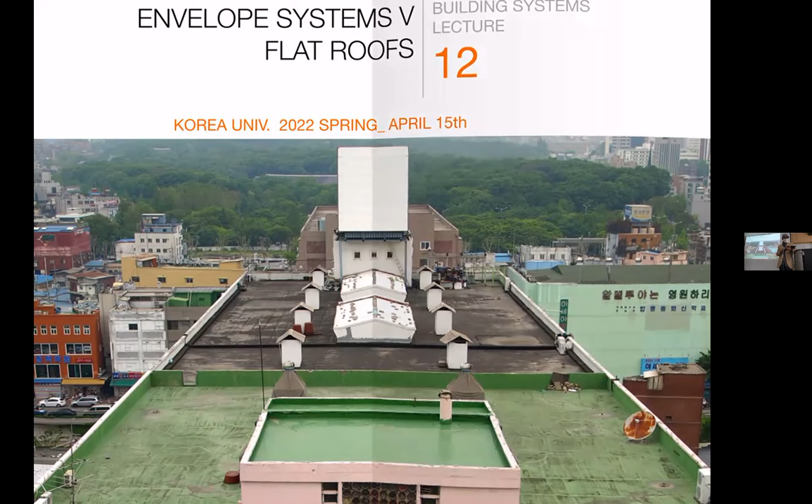Again, this is a reminder, we said yesterday, the exam is next week, Friday, in just one week, okay? Especially for those online, online or offline is not an option, okay? Everybody has to take the exam. And if you cannot, you need to have a medical reason. And remember, the other 3 sessions will be fully online.

So I promised to talk about the exam, and I see you excited. So the midterm exam, somebody's phone is calling.

So midterm is 25% of the full course, right? So it's not a huge deal, but it has some impact on the grades. Final will be the final assignment, right? And you see that the most part are the assignments. The problem is we had only time to do 3; the plan was to have 4 assignments. So let's see what we do with the 4th, because the second part will be 4 assignments. It's not balanced to have 3 in one part and 4 in the other. But okay, maybe we can have all 7 account for the 40%. Okay, and attendance is 10%.

Actually, in the photo is this classroom. The first theory class I gave in this university was in this class in 2012. So in principle, I think we have enough seats, so we can probably do it in this classroom. We will give 5 minutes margin, and the exam is 1 hour, so we still have about 10 minutes margin. Fortunately, on Fridays, there's no class after, so if people need a bit more time, we can give a few more minutes, but in general, the hour is more than enough, okay?

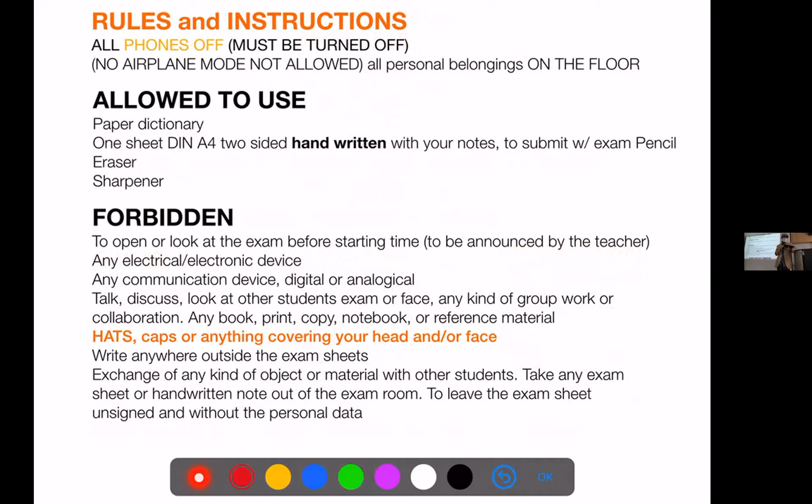Well, these are the rules. I will not read them. It's all common sense. Things which are important: we need to see your face. I know many people didn't have time to wash their hair, and that's okay, but when you come to the exam we need to see your face, right? Don't put your hair in the front, so we can see you are looking at the paper. Yeah, it's kind of a silly thing, but in order not to have problems, get ready for that.

The memo is important. If you took the materials course when it was offline, you already know. It's important you do the minimum in the memo so you can find things fast. Because if you copy too many things, chances are you make mistakes and then you cannot find them. And your mind is much faster than anything else. If you understand things, you don't need it and you will get to the point very fast. Okay.

So we have examples, and I got some of the best ones. This is a typical sheet of a confident student who only needs those words or formulas or numbers that for some reason had to be memorized. This is kind of an extreme thing, right? And this is a very common case. This takes so many hours to prepare. Probably it helps your study because you have to systematize things. But when I look at them, I find many mistakes. And then those students spend more time finding the data than really doing the exam.

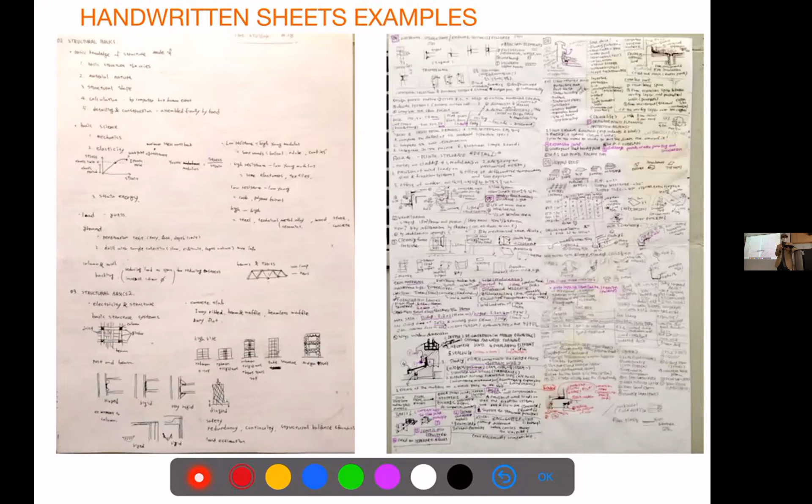This is another couple of extreme cases. And then, well, some of them are quite nice. This could be a kind of small cheat sheet we could provide with the course for your review. The problem is none is good enough. But okay, you have that possibility. This is just to relieve the stress and not think you have to overload everything in your memory. But for most of the questions and problems in the exam, understanding the logic is more important than having the data.

So I have one question for you on the activity sheet, and this is about your possibilities. I will make an online survey in Blackboard, but still I need to know now, especially for those online, right? I know everybody here is healthy, and hopefully will be healthy next week. But for those in class, and especially those online, I need to know if you can come to the exam offline. Actually, it's not planning. If you cannot do it, just say the reason why not. Activity sheets are there. Okay. So I guess everybody here is yes. Let's wait just a minute for those online.

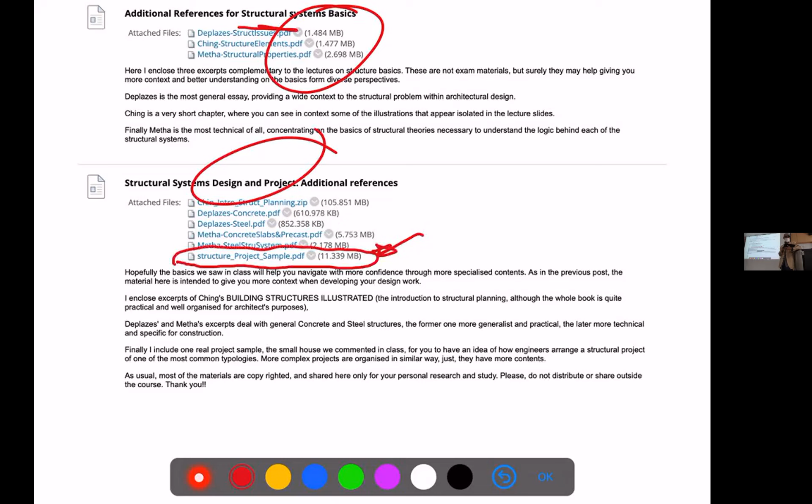And then we also have basics for the envelope, and what we saw already, windows and curtain walls. Especially in the chapter on curtain walls, you will have the two examples mentioned in the handout, including the one we did in class. There were some questions I will share here because I think they were interesting. One was about silicone. Some people asked about the difference between silicone and neoprene and so on. There are a lot of differences.

But this is a nice building. Well, it has nice details. This is the Museum of Modern and Contemporary Art in Seoul, next to Gyeongbokgung. They have polycarbonate panels in the facade, which is a possibility. The problem with polycarbonate is that it's flammable. If you have a fire, the whole facade will catch fire.

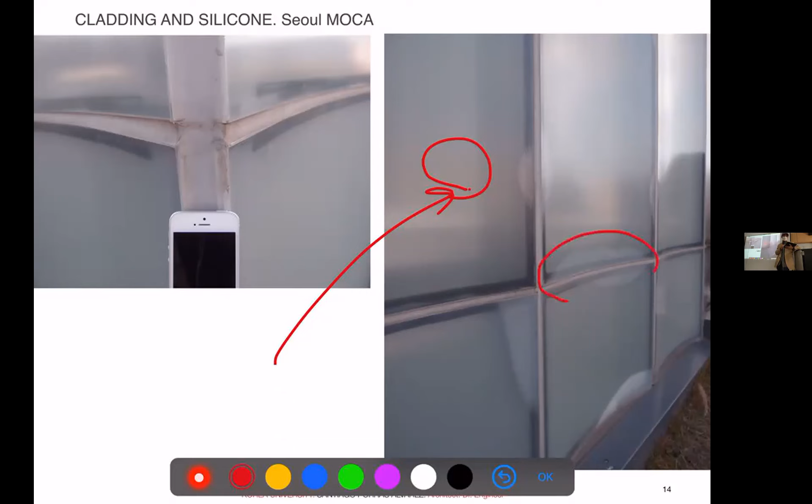But this is low rise, and probably they will have some idea of how to deal with it. Not a good idea to use in a high rise. But you see, polycarbonate reacts with the chemicals of the silicone. And this is just 2 years after the building was open, and all the panels are already ruined totally.

And then this is an iPhone 5, so you can guess when the photo was done. But you see the silicone you put there. It makes it easy to correct errors, but it's not really a good solution, right? Silicone is not meant to be so thick, so wide.

And nearby there is the nice Seoul Museum of Education. It's just part of Jeongdok Doseogwan, Jeongdok Library. And you see that, of course, the door is put with a bunch of silicone around because it's a new door. This is not a nice detail in a building which is supposed to be historical. Not even a nice door, that's another thing. But they're using silicone even to repair the joints between bricks, which is kind of nonsense, I think.

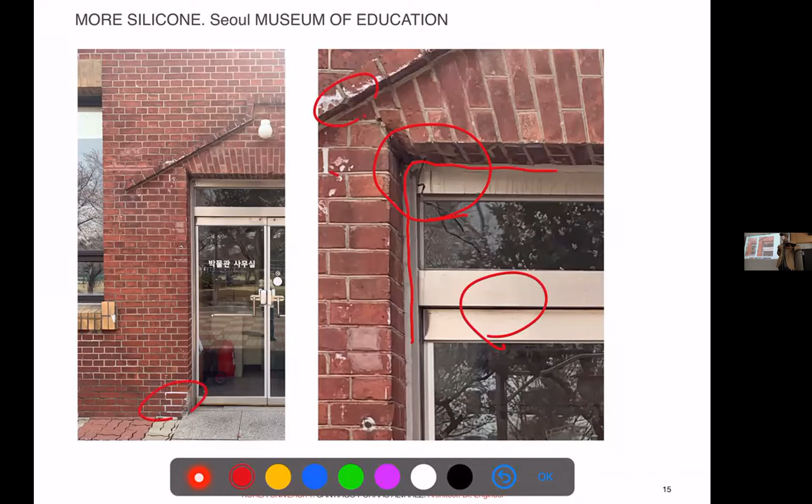Then about the dripping elements, some asked the difference between drip and flashing, right? So drip is just the element which makes the water fall. So it's just whatever prevents the water coming in. Flashing is a sheet of a waterproof material which will cover joints, so it will make the water run over some joint which is difficult. So a flashing can have a drip, right? But not all drips are flashing.

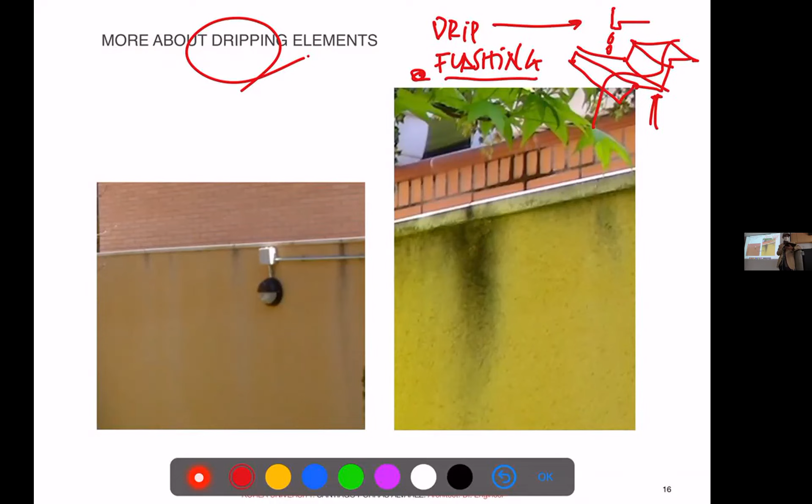And this is the case. This is an example I used to show in materials. Actually, this is the garden wall of my house in Madrid. Well, this is the next house, but this is a brick wall with an artificial stone element on the top. So it has a drip, it's the standard. But in the joints, the cement just blocks that, and then the water runs around. And this photo is taken just 2 years after. Nowadays it's like a really nice black and yellow wall, but the plants are covering it. So that small detail makes such a huge change in how things perform.

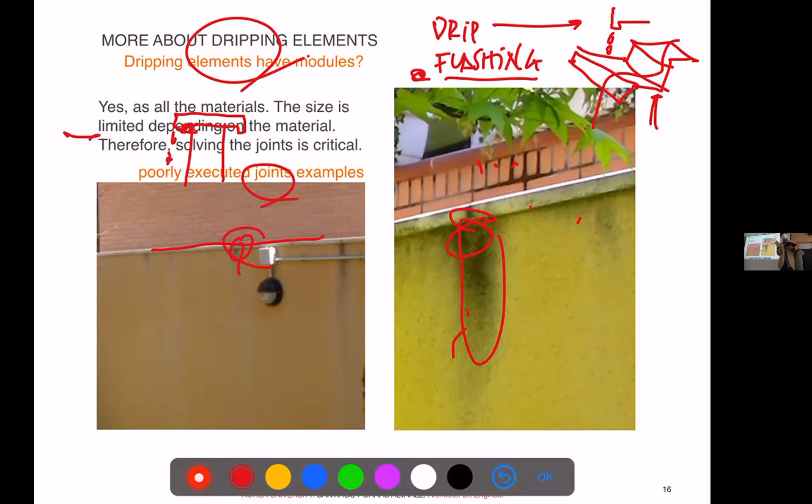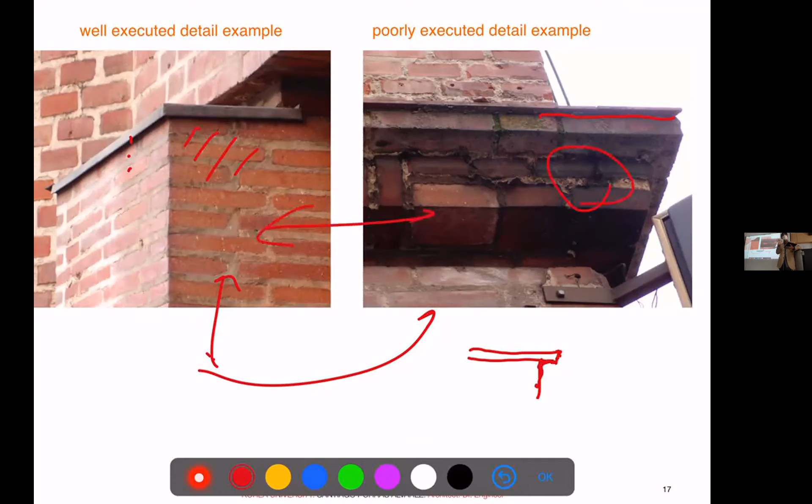And this is our school. This is the bridge between the round building and the library. And this is the same, the water just slides, and it stays there a long time, so it can react with pollution. We have plenty here, and then the metal rusts. And I wish they will repair it soon, because it doesn't look nice. And this is the structural elements. Just having a small detail would have made the structure as clean as it is at the top.

So let's go to the lecture, and I will go fast on the introduction because it is the same as materials. So I have the link. Sorry, I didn't have time to make a QR code to see last semester's materials class lecture on flat roofs. And actually, I checked the YouTube. You enter at minute 17, so you can see in less than 1 hour all the basics, so we don't need to repeat them. The first 17 minutes were the end of curtain walls, which we didn't finish. So you can see different examples of similar things we explained, but the link brings you directly to the flat roof. So I will not explain everything. The photos are here, but I will pass fast over them.

So we have the strategies, historical outline, design process, and detailing, especially the three main kinds of roofs, then the checklist and case studies. So all these parts will go very fast, but we will stop a bit more in the design process.

So remember, we have the typologies, the possibilities of connection, the layering. That applies both to roof and facades. We have to consider the climate first. This is something we just forget in the design process. We think buildings in the same way in Seoul or in Ho Chi Minh. It's not the case, right?

And one thing which is proper of roofs, we have to deal with water much more. So we have to see how we deal with the water collection and the snow when it's snowing. So history: even though flat roofs are iconic of modernity, we have had flat roofs through history, right? And almost in every culture.

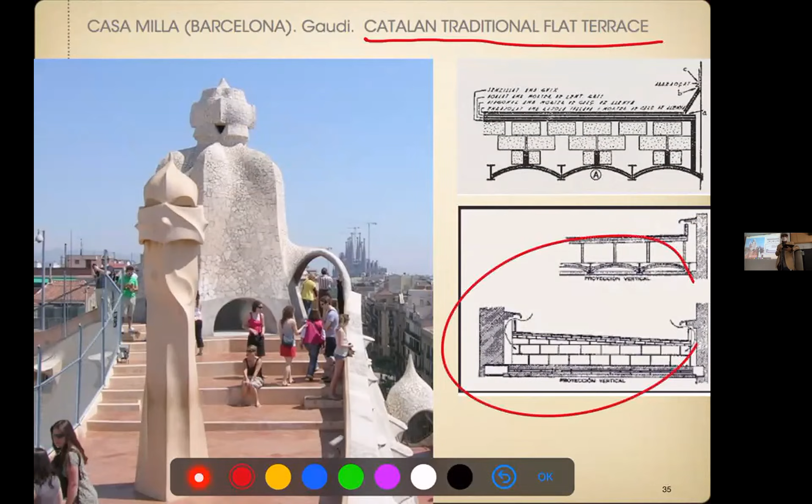I will stop a little bit here because this is Gaudí, this is already modern, and he used a lot of flat roofs. And they had a technology which is called the Catalan flat terrace or Catalan roof, which is quite interesting. This is the detail. I made a diagram, which is not better actually, but shows 3 points which are quite important.

First is that the ventilation is there, so the air can freely move around, and the roof and the parapet are not touching, right? So that ventilation is very important because any kind of infiltration will eventually dry, but also the humidity which goes to the top will be washed away. So you will not have this kind of condensation we see, which is a problem in roofs.

Then that also helps to have this kind of gap in which the roof can expand and contract freely, because we have direct sunshine on top of it. So it will expand quite a lot. And you have also the coldest part. So roofs are by far the hottest and the coldest part of the building because it has much more radiation than anywhere in the facade. And it gets the whole exposure to winds, snow, and the cold.

See one thing, which is the free movement is achieved by these elements. So this is traditionally made of brick. It's kind of a brick made slab. This is like a light brick made kind of honeycomb. So bricks leave the space. This is the elevation of those elements. So the air may move between bricks.

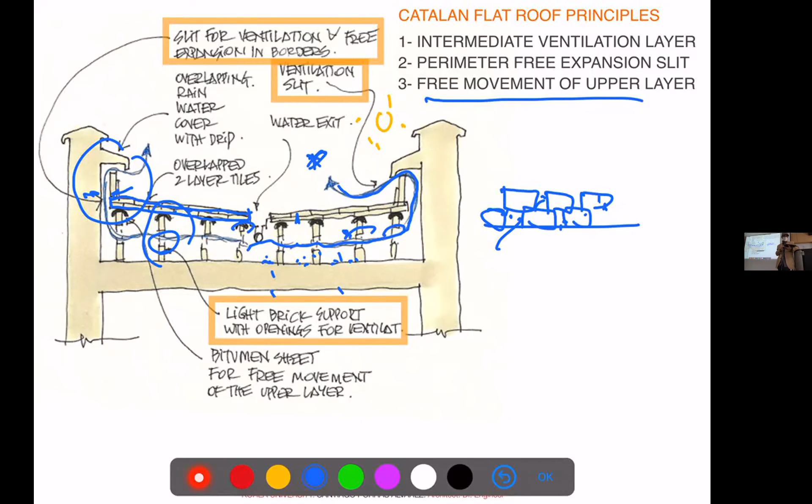And on top you have just bitumen sheet, which gives some elasticity, but allows just a few millimeters movement without problem. So it will not make damage in those bricks, because when it expands and contracts, those bricks may fall down. So there's 3 points that are incredibly modern. So if you understand them, we have some of the basics of modern roof design with different technologies, but 3 points which actually work very well, and still this system is used.

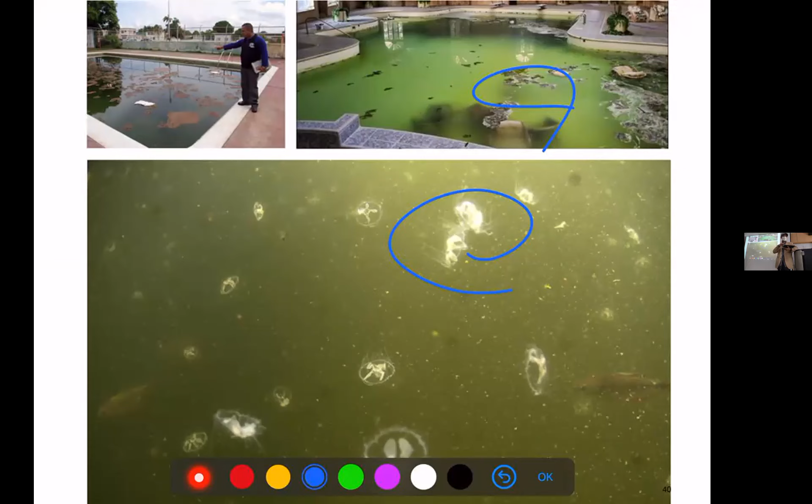So we have design with water. Water roofs were very trendy in the 1940s and 50s, but have this problem. Water is organic and it creates an ecosystem. So you have to maintain it. It's like a swimming pool. And then if it's a freezing place, you have to take care of it when it freezes.

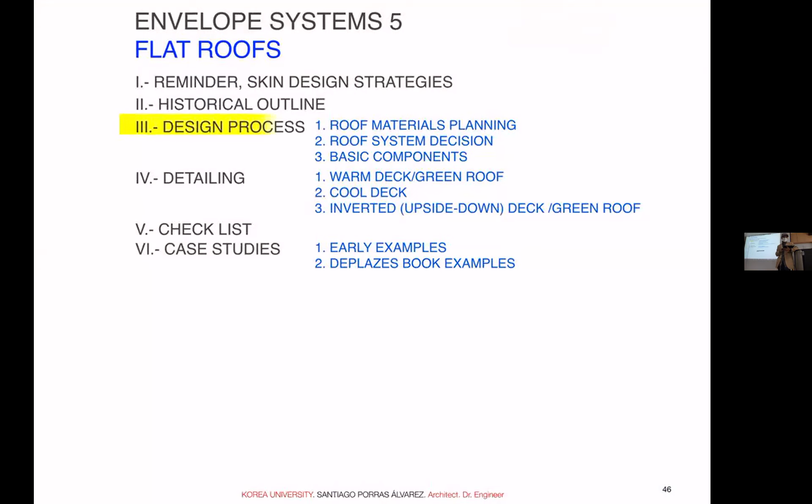And there's Pompidou, they have a nice reception system. The roof garden is kind of a great achievement that we'll try to deal with. And this shows that flat roofs are still a big choice because you have extra space to use. So let's see how we plan the roof.

And the same we saw with the facade. Now multi-layering is the key word. You can have only a one layer roof, but nowadays it's mostly multi-layering, and that will define the detailing we do. They should have some explanation. So mostly we will have the base, which is the structure. We will need some element to make the slopes to let the water run, right?

Then, depending on the kind of insulation we have, we need a vapor barrier or not, and insulation. And then we have the waterproofing sheet and some protection. The elements we always need will be the waterproof element and the base, right? Insulation can be inside, so it's not always part of the roof.

There are technologies to have roofs without slope. It's not the best, but it can be in some climates, right? And you can have a waterproofing material which can stand the aggression, so it doesn't need protection. But this is basically the elements we have, right? Of course, the base, slope, insulation, waterproofing, and protection.

To make the choice, we have several typologies, different methods to do it. And we have our knowledge of materials, which you will have to review because now I assume you understand the different kinds of waterproofing and insulation and so on.

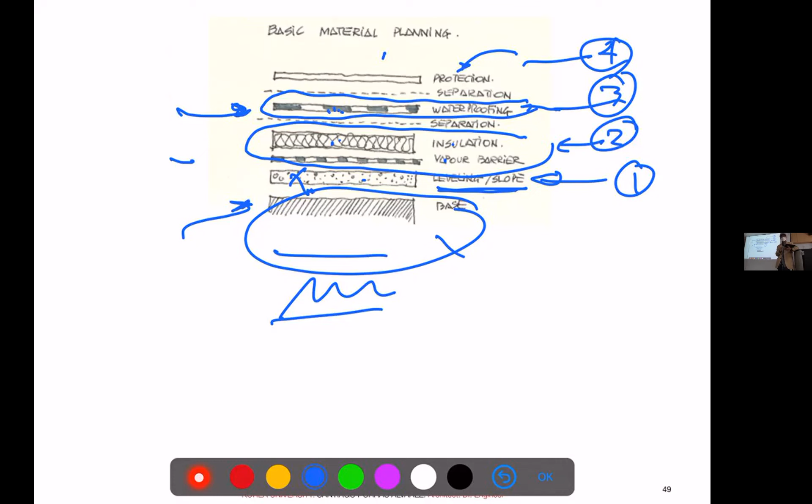This is how it is explained in the book. Again, I advise you to have a consistent graphic for each of the materials you use. What I see here is that sometimes it's very hard to distinguish between some of them, so you have to be very careful when you look at the book.

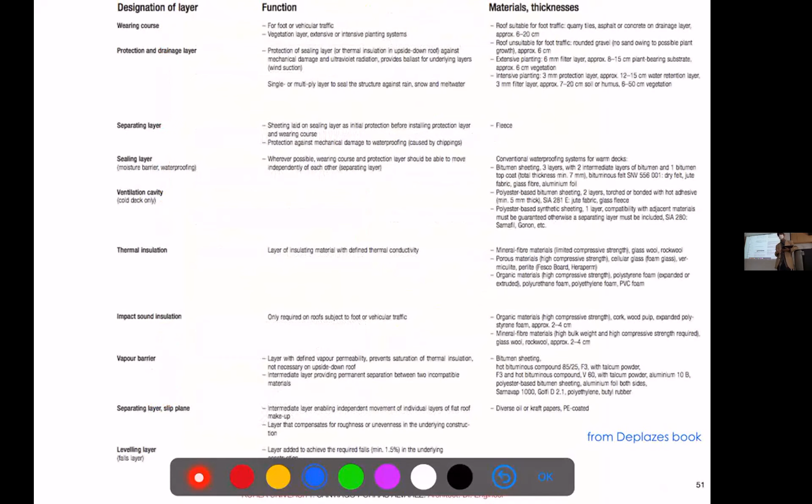This is a more detailed description of those layers. I will call attention to the separation layer. Sometimes we stick the waterproof layer to the base and it's okay, but very often we put an intermediate layer to allow free expansion movement of that sheet, to make replacement or repair easier, and also to avoid chemical incompatibilities between materials, which happen.

Then ventilation is something you try to do the same as in the vertical envelope. In the horizontal it's interesting, as we saw before. And something important in flat roofs: when it rains or you have hail, like ice coming in with big rain, the sound goes to the inside. You can feel, especially in cheap construction, the water coming on your head. If it's visitable, people walking will also make impact noise. So you have to see how we can deal with this noise.

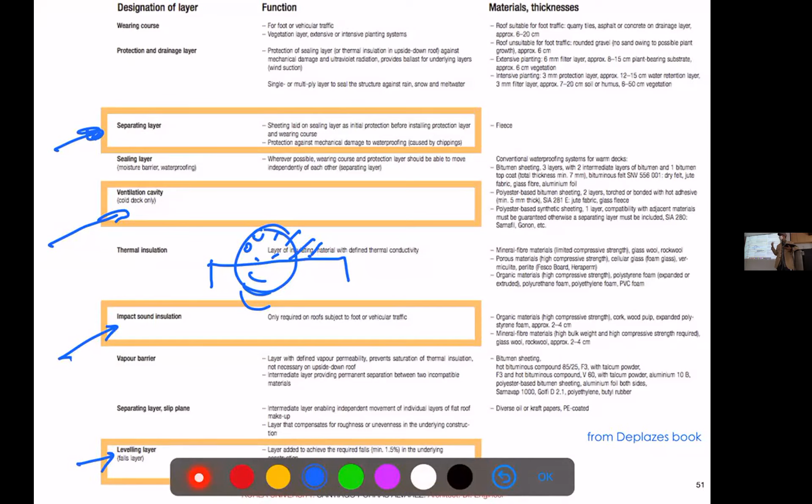And then the leveling usually has some range, but you need the water to run out. In our project, planning those levels together with the exit points for the drainage is part of our project, and it's also a design decision.

Just to help, you have the link to the handout of materials. This is the 2020 handout. I didn't change it in 2021, so it's the last version. Look at it.

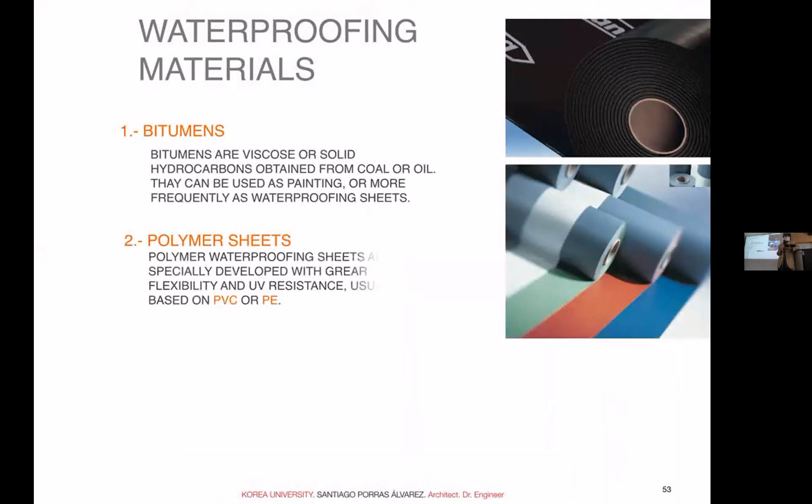So this is kind of a reminder: we have like 3 families of materials, and all 3 are used widely. They have advantages and inconveniences, but we don't have time to repeat them here.

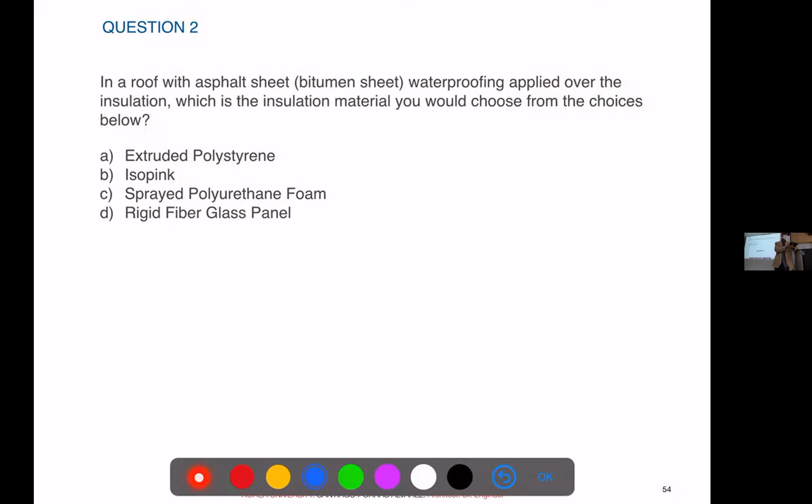But yes, just to keep you awake and push your memory, let's see how much you remember from materials. This is a typical thing which happens in the exam, not this exact question, but maybe in the detail you will have to decide the waterproofing. So we have asphalt sheet for the roof, this bitumen sheet, in a roof, and this is just over the insulation.

You have 4 choices of insulation: extruded polystyrene, Isopink, which is a brand but still very popular here, sprayed polyurethane foam, or rigid fiberglass panel. Which one would you choose out of those? I'm not speaking of the power of insulation and so on, so we assume they are all high density, so they will support the pressure, the weight, and we assume they will need different thicknesses, but we will have the optimal thickness.

Did you make a choice, everybody? Did you make the right choice? Somebody still thinking? So this was an easy question. Anemika?

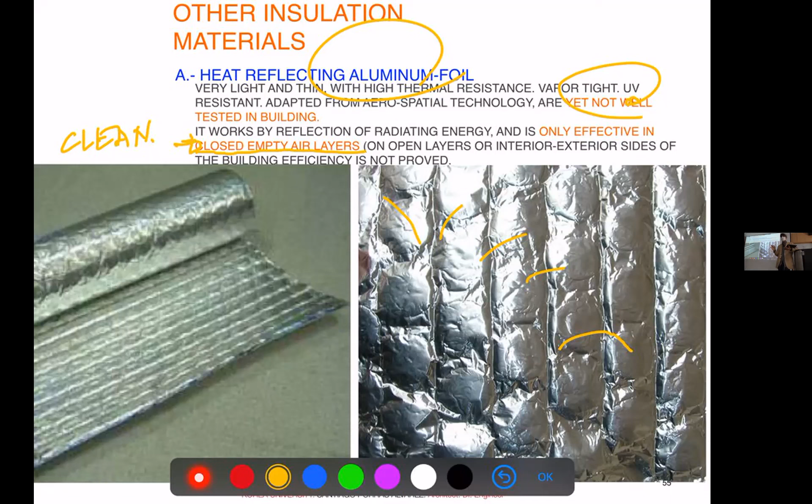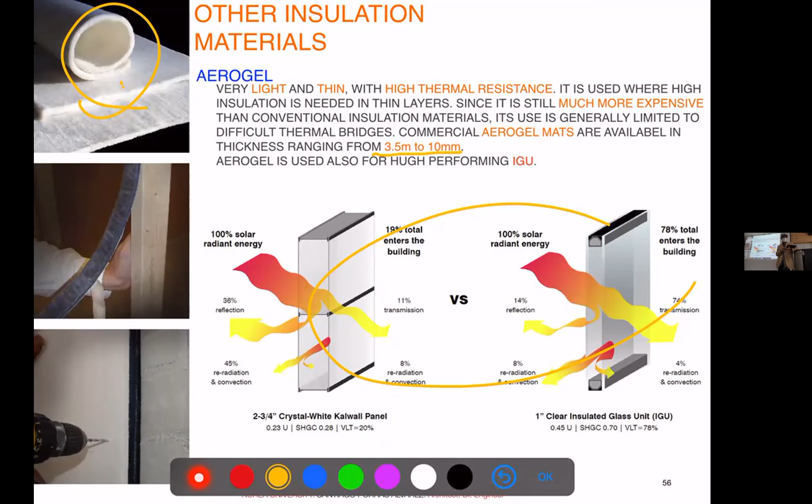The other thing is the aerogel. It's a great material, can be transparent, used in many ways. We have some examples of aerogel use. The point is it's still extremely expensive. It's kind of a dream material, and it is sold, it's so hard to manage that it's sold like impregnating a felt textile, and you need so little that it's usually 3.5 to 10 millimeter thick sheets. We use this usually in places where we don't have the space to put 10, 20 centimeters of material, so with 1 or 2 centimeters of this you have the same power when you don't have space for that. Still a good choice if you don't need to use a lot of area.

We have several choices, and that's mostly a problem of design, but also climate and budget. The first decision is where to put the water out.

The safest is to throw it away, which is easiest, but you will always have problems with people down below. Very often it happens in front of the door, which is not a good decision, because when you plan the roof you are not thinking about the ground floor. Be very careful with that, and often with the wind you'll have problems on the facade.

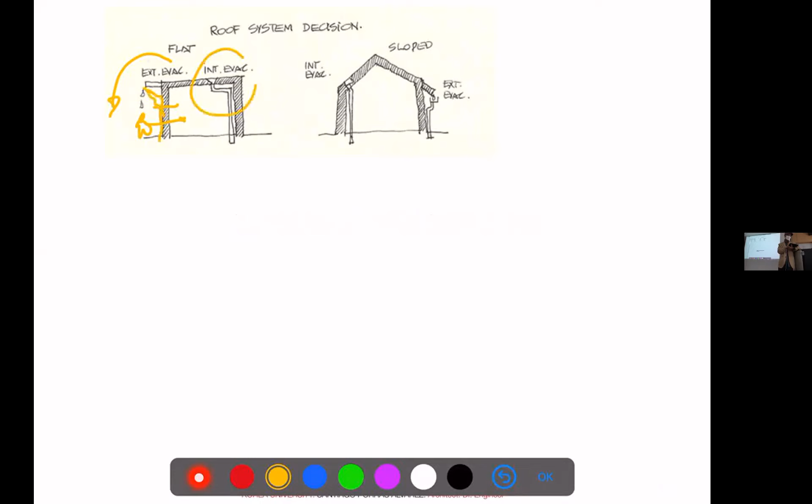That's the easiest option. The most common is to collect it with some kind of drainage. This is the usual approach, but then you have to design and decide how many points you put, and you will have a cold element inside. This wastes energy, it's noisy, and it takes up space. The same happens with sloped roofs.

Then we can use the traditional roof, in which we have the insulation and then put the waterproofing at the top, or the inverted roof, in which we have the insulation on top of the waterproofing. This is what's called inverted or upside-down. Why? Because traditional insulation cannot get wet, it's not compatible with water - it gets spoiled. But with polymers and so on, we can have insulation that allows water to go between layers while still being insulating, without losing efficiency.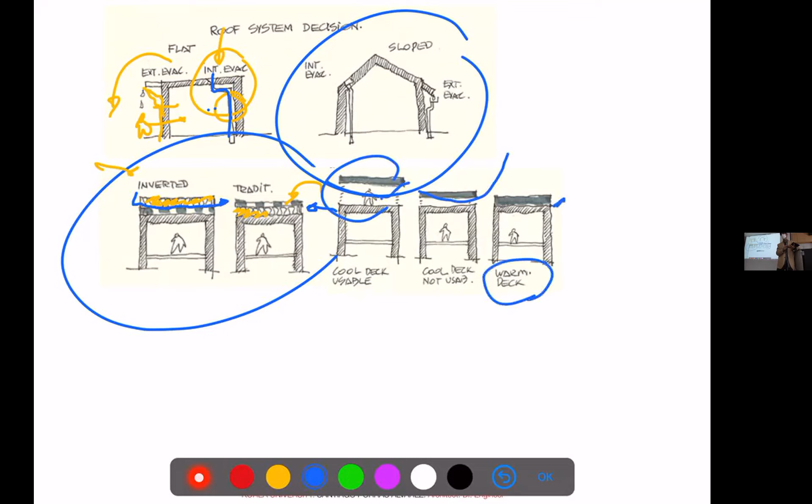And then, as we saw, there's the possibility of ventilation. You can ventilate a lot and even have a special space, or you can have what we call the warm deck, which means it has no ventilation at all. And you can combine those systems.

This kind of ventilation layering is also possible in sloped roofs - this garret-type element, which is kind of exterior-interior, is very much used in rural areas to dry grain. In Spain, to dry Iberico ham in the mountains, you put the jamon there. Also for drying tobacco and things like that. This is quite an interesting place to work with.

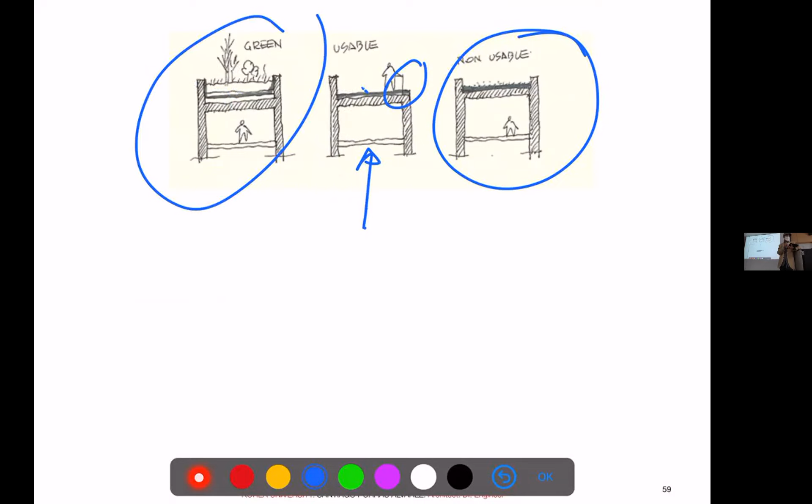And then, of course, you can have the most simple, most cheap option, which is not a usable place. A bit more complex, because you need safety and more protection, is the usable element. And the top option is green roofing, which can be usable or not usable, but if you put green, you need at least people to go for maintenance.

To make things compact, this is kind of prefabricated - the same material we saw for the basement walls, but here it's horizontal. So the water slides, isn't accumulated, and can be drained. That allows for a minimum amount of soil, which makes it possible to build very thin roofs with plants. But if you have trees, you have to think of this layer as at least 80 centimeters to 1 meter for small trees. That's a lot of thickness and weight.

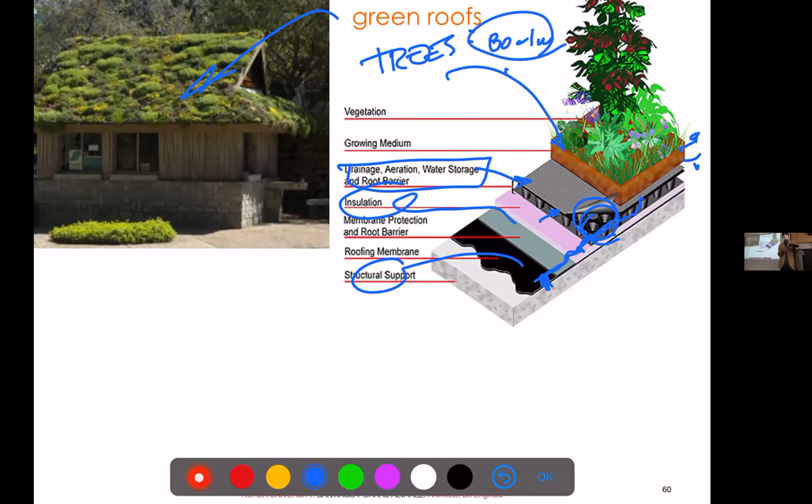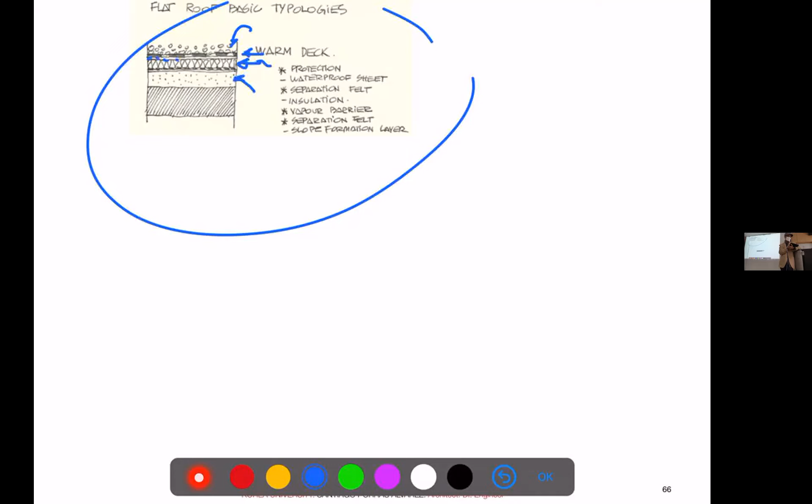So these are the basic typologies of components. The warm deck with all the elements will have, from the top: protection if necessary, the waterproofing, insulation, and the slope formation, then probably separation felts if necessary. The cool deck is just the same, but that protection is separated in some way to allow air circulation, which gives better performance. Then the inverted deck has the same layers, but with the insulation on top of the others - this limits the choice of insulation materials, of course.

You can have inverted and cool deck together, that's a possibility. But cool deck is usually the first choice because it's much easier to maintain and gives more protection to the slab. You have no direct radiation because this gives shade, and any condensation or filtration will be evaporated. So it's quite advantageous.

Inverted deck also has other advantages. Once you put the waterproofing, the insulation is very light, so you can put insulation immediately and it will be immediately protected. Since the waterproof sheet, usually bitumen or polymer, is very sensitive to heat and radiation, it will be immediately protected, and won't have brutal changes of temperature. So those roofs will be much more durable. This is the second most durable, this is the less durable, but it's the cheapest, and those two are more expensive.

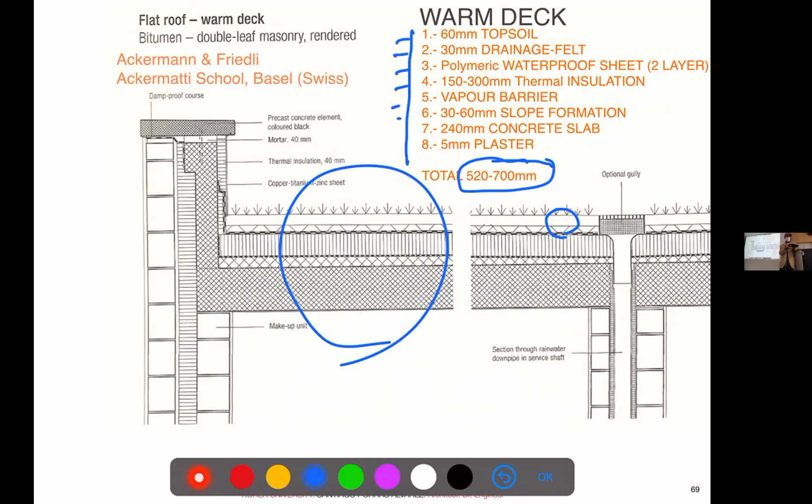The book gives you the parts by numbers. When you detail, please mark them one by one, so there's no confusion. Do whatever you want when you work, but counting layers and watching the numbers is a very good way to have clean and fast drawings, but also avoid a lot of mistakes in construction.

So you see what we have: we need to repeat the base layer, the slope formation, the insulation with vapor barrier. Then as this is warm deck, we have the waterproofing just on top of the insulation, the drainage layer for the plants, and the planting, which acts as protection. We could say this is cool deck, but actually this drainage part is not ventilated, so it doesn't count. But of course the plants and soil give excellent protection against UV rays, because plants are kind of radiation collectors and cool a little bit.

Then you have a difficult point, which is the drainage point. See how the pipe needs to be insulated, because this is exterior, so all the air and cold will come inside. This insulation is both for heat and for sound, because water is very noisy coming down. Also you have some gap, because this is a hole in the concrete, so you have to put a pipe inside. You need some kind of gap to be able to build it, and then you will insulate around. This is a basic construction problem, an interesting point to take care about.

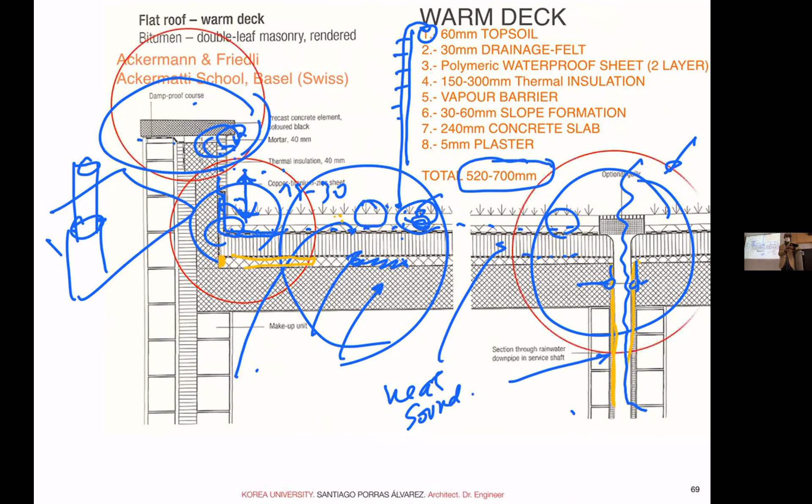This is the ugly thing I mentioned, and I promised to redraw but didn't. This is the same, just in a diagram. When we detail, now we're thinking about the roof, so we forget about the structure, just the opposite of what we did in our assignment. Now structure is whatever, but we are dealing with the roof, so we have those problems of insulation with sound and gap.

Many people are confused with this graphic here. This is no more than just one pipe with a small neck, so you can put the following one.

This is what this thing means, right? So you always connect in this way, so the water does not go against the joints. One mistake you see sometimes is doing this in the opposite way. So you will have the pipe and then the connection like this, right? And then you will probably have leaks. Very seldom, but sometimes you see it.

In this place, I have been clear. It is good practice to always have, depending on the size of the roof, but 2% is very easy to achieve. And it also helps for the fabrication of this part, the duplication of the sheets, and let me use a clear red.

So usually you make a first layer, right? And then you put a second one, and then you continue over to the end, right? So this kind of overlapping in the difficult parts. So you have double, and you try to soften the bending, because those materials, if you have very tight bending, may crack, and they may end up performing worse.

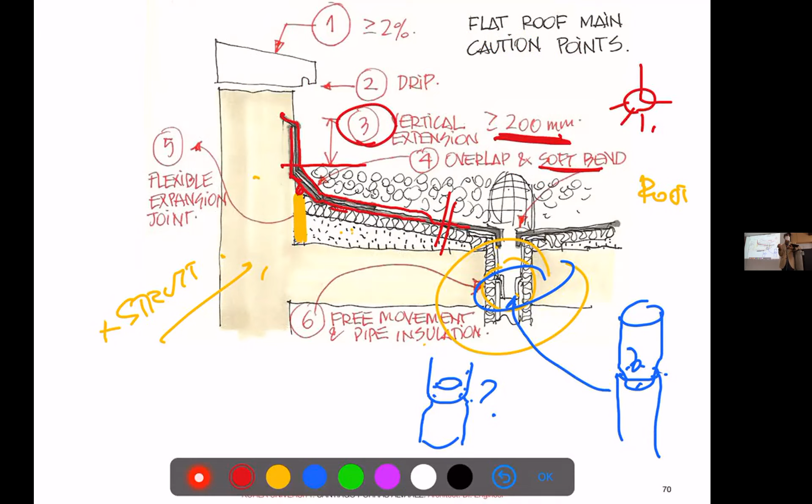And you have, again, the vertical extension, I said between 15, 20, and 30 centimeters, depending on the codes. And we always consider from the finished part, just as extra, at least 20 centimeters. It will help a lot. This is not a problem.

So the other thing which creates problems is the gully. So the top is the element which collects the water. And then we try to have the waterproof sheet go in. So we made a hole and we put the waterproof sheet on top of it. Since this is a weak point, we try to have another layer previously.

So if you make the section, this is the waterproofing with the opening. This is the pipe in section, right? But we try to make another layer just to make sure there are no leaks around there. So we make a previous preparation, as we do in the corner and in the border here.

Since we have too many layers there, if we don't plan well, it will happen that we will have the water exit with many layers of waterproofing, right? And the water will accumulate around it. So it's something you also have to be very careful about how to plan. Because 90% of problems happen around this point.

Because where the water accumulates, problems may happen here, but if you're careful with the joints and the construction, it's okay. But the water slides to this point. So it's where the most water accumulates the most time. So it's where you have to be more careful.

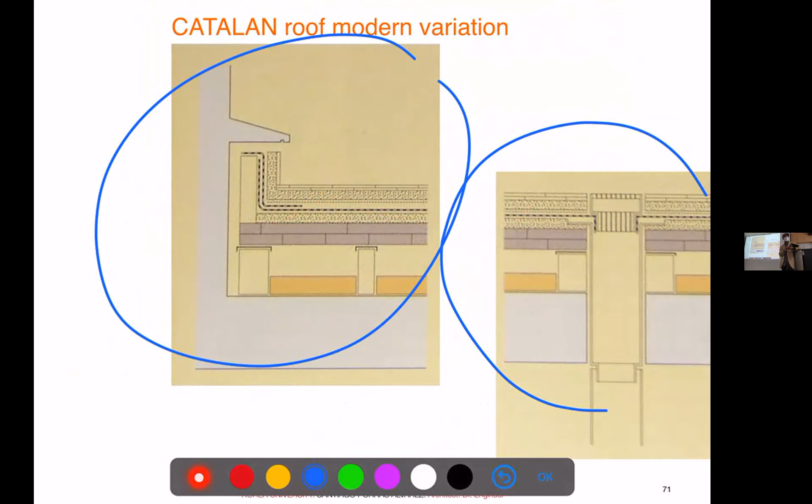And then, well, this is a repetition. So this is the detail I told you to study at home. This is the connection of the drainage point. This is a real project solution, so you can check and identify the elements and see how it works in that project. So let's see more examples.

Let's see how much we can see today, because we have 30 minutes. Let's not run. If we cannot see all the details, at least they're in the handout, in the materials online, and you can follow the logic. And always ask if there's something you do not understand.

So this small house in Switzerland, this is from the book. And this is totally minimalistic. You have a green roof, but it's showing nothing outside. No drip, no border. It's typical minimalism. So this is the minimum you can do. Pity they don't show the drainage. Always show the drainage point, right?

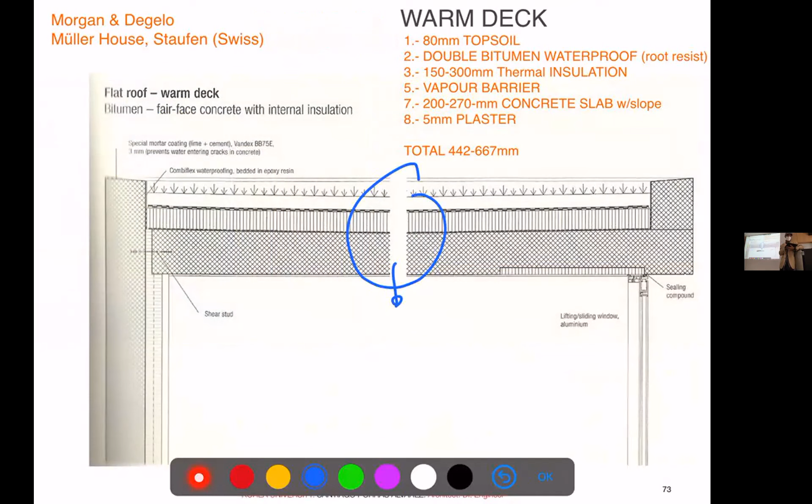And it has some kind of green. So probably you will have the possibility to access it to clean from time to time. But many things are omitted here. See, this is a structure, but you see how they put this kind of connection we saw before to have insulation continuity. But when you don't have a wall, you don't have that possibility.

They don't show the detail of the border, which is a pity. But what I do is to have waterproof paint on this border, some kind of sealing on the border. So in this case, I would not be very confident about this small border. And if it rains too much, the water will just overflow temporarily.

So when you don't have any possibilities, just a waterproof paint. And that's it. But even in this case, you have a quite thick, tall roof. And this is the minimum you can make. So it's a good example of minimalistic with difficult points, right? You have one difficult point and another difficult point in terms of insulation.

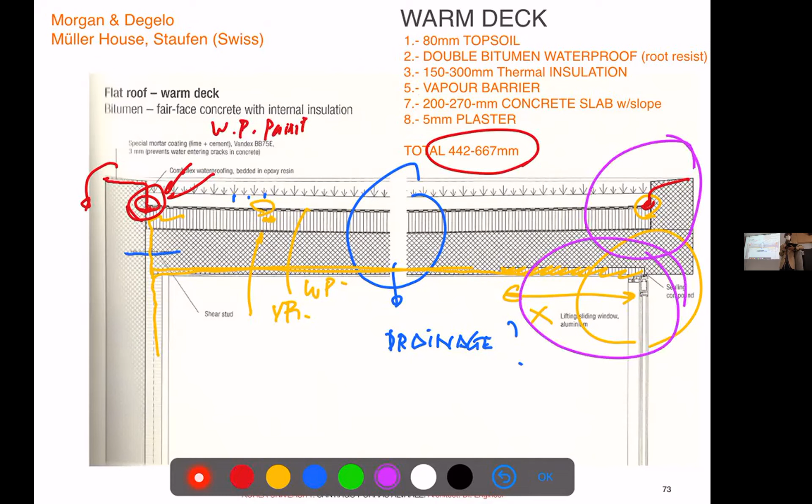This is a bit more conventional building, but still interesting. Again, from the book, it's a multi-purpose building. And this is interesting because we have a terrace. This is something you can access. Things we see here: you have very heavy cladding fixed by angles to the facade. You have, again, water collection probably in the middle, so we don't know how it goes out.

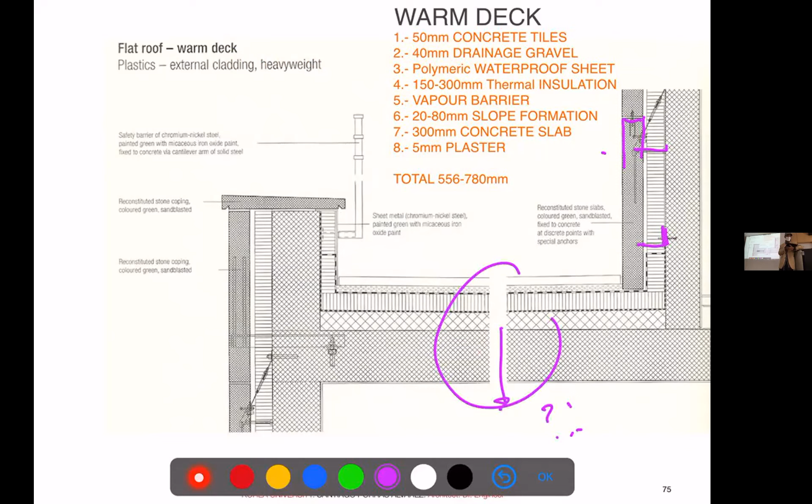But we have one detail which we need always to take care of, which is when you have a handrail, where do we put it? If we put it on the top, we have a weak point where the water can just infiltrate. So always when you have to put something getting out, it's better you put it in a protected area. So I think this is an intelligent solution. It's a bit safer also to work in, but you have a clean drip. And you see in this case, you have drip on both sides, which is quite intelligent.

Other thing which is interesting is the continuation of the waterproofing all the way to the top. So you have more safety there. And also on the other side. So you see that always you have this kind of minimum 20 centimeters from the finished floor. Other thing is the flooring, which has open joints, so the water filters under the floor. So you have the slabs of the floor, gravel. So you can remove them, clean, maintain, and put them again. This is quite a simple but efficient way of doing things.

Very simple detail. Well, this is not so simple. But again, you have to support very heavy pieces of stone there. But well, interesting two points I think are worth mentioning.

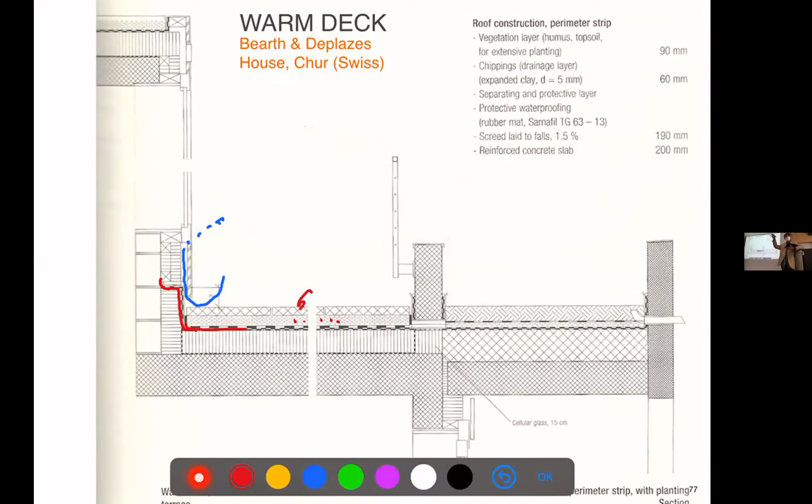There's another case a bit more complex in which we have a terrace with garden. So we have to deal with two kinds of roof. And that's quite an interesting detail. You have a clearly ventilated facade in some way. They don't show the exit, but surely the air moves around. We don't need to explain this part, right? This is well done. You have the gravel and the floating slabs, as we saw before. And we have the parapet, which divides the part with the slabs from the part with plants.

And see how they put just a kind of line which allows all the water here to go to the other side. This is a drainage layer. So all the water that filters goes to this layer and then goes out, right? And this is exterior, so they don't need insulation. You see the insulation disappears as soon as you go to the terrace, and then you have a difficult point, but the terrace is totally independent. So all the water which is collected in this terrace moves to this hole and goes around. So it gives some kind of humidity to those plants.

And then it will have the gully, but you may have also this kind of exit, and this is kind of a safety opening. So you may have one filter, and in the case this gets full of water, the water will go to this point. So you have like two exits in this point, which is an interesting thing. You will see, okay, this is the connection of the roof on the top, which we saw before. So in this case, they put 12 centimeters. Again, it depends on the codes.

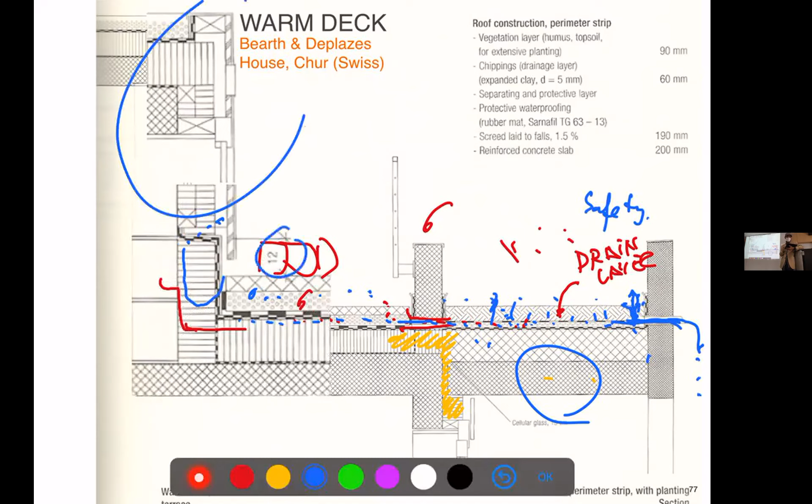And then that endpoint, which is always some place you perforate the waterproofing. That's a difficult point. They don't say how they do it, but the same detail we saw for the vertical exit, you will do in the horizontal pipe, not filling it with silicone. Silicone you will need to repair almost every year. So it's an interesting solution to quite a difficult detail and works in terms of sustainability. You are using water just to plant the green next to the terrace. Okay.

This is a little building which has balconies.

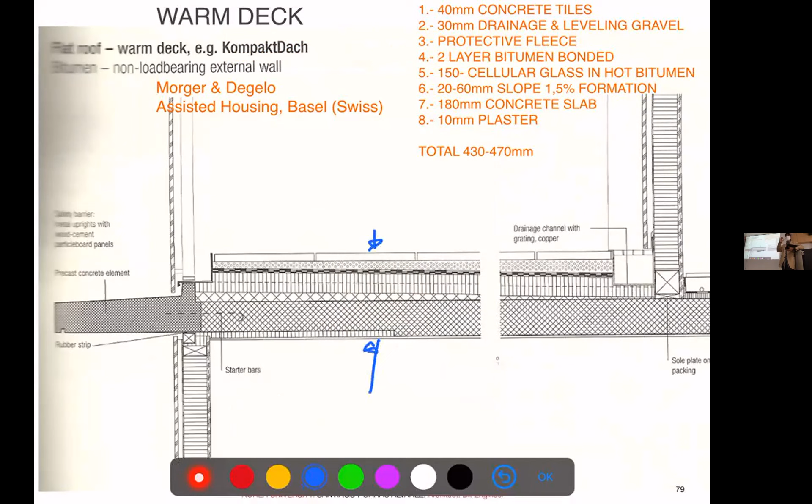So this is the balcony detail. I find it interesting the way they change the structure. Let's go back. So you see the terrace is very thick. And if you go to the front with that thickness, it's quite ugly. So to make it look nice, they do some kind of device to have just a minimum structural element in the front. So you have this kind of thin terrace.

This is order made. You see the drip here. You have the water going to the small eave. And this part on the top is perforated. So any kind of water which is accumulated here goes out. The slabs are loose, so you don't have to worry about the expansion joints. And you have plenty of insulation and 2 layers of waterproofing.

So this is some problem you would have very often. You have this kind of balcony in the border. Thick floors are usually not nice unless you're doing something very massive and that makes sense. So this is a possible choice. Another thing which is interesting is, instead of that drainage point, to have a trench.

So in this case, the water with the same detail. So this is a perforated sheet, but instead of being an angle, it's a full box, right? So the water, if there's overflow of water, it will go through the trench. Goes from the facade to go to the trench also, but whatever is filtered goes here and is collected in one line next to the facade. So a continuous trench. Also quite common, a good possibility to simplify things and have more safety. And this will go eventually to a gully point.

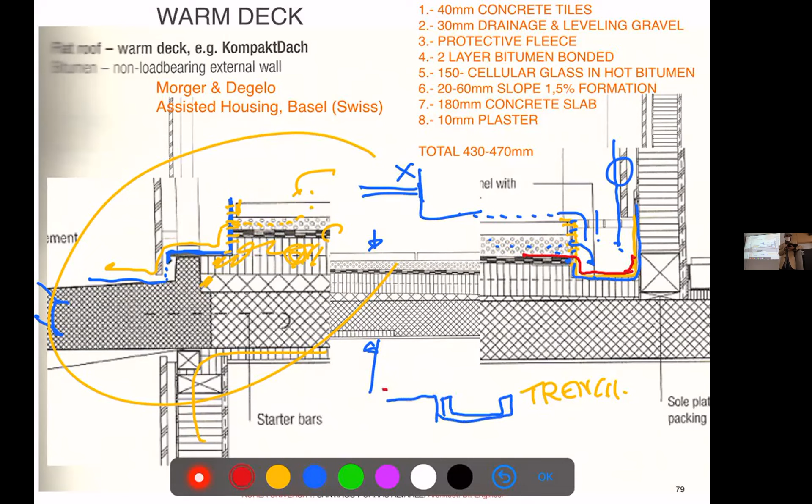See, the facade is ventilated and, they don't show how this happens, but in general, with normal solutions, you will have the waterproof overlap with this element, which is under, right? In this case, they don't say how they did, but you will not stop the waterproof at that point. This is not a good solution. You have always to overlap and make sure the water will slide over the joints, not under the joints. So we have the base, we have the channel. The waterproof has to go over those, right?

One more case. Temporary nursery school. And I think this kind of a timber building is quite interesting because it's a ventilated, non-visitable roof, in timber. So this is like a minimalistic construction, minimal shelter. So it's all light construction. Surely it is a timber framing system, which has just finishing plates inside and outside.

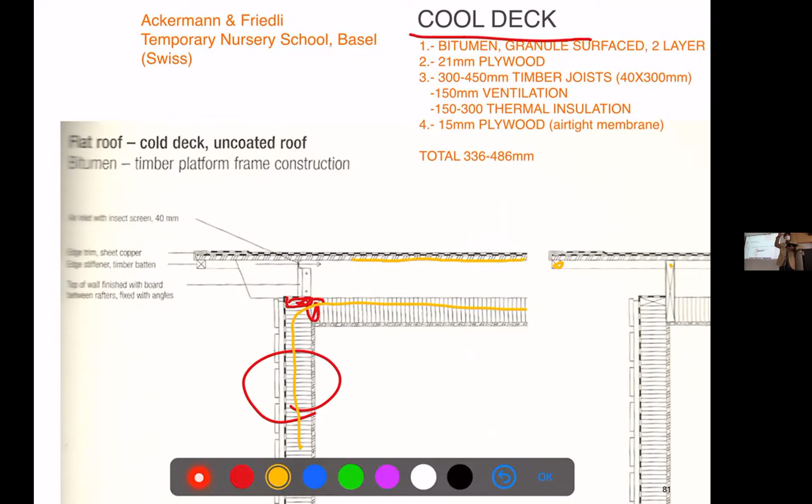So that provides a very continuous insulation and also a very basic structure to support a base element, which produces timber boards with just the waterproofing and plenty of ventilation. Right? So it works very well. It's very light. But again, this is temporary construction. But it explains very clearly the concept of this kind of cool deck.

What I'm not so comfortable with in the cool deck is that the waterproof is exposed to the sunshine, so you don't have that benefit of protection. But in terms of the thermal performance and avoiding condensation, it is quite interesting. It is quite large. One thing you have to do when you have ventilated layers, more than 20 millimeters and even smaller, is to have some kind of net. This is a perforated or mesh metal, so birds do not go in.

Insects will go whatever. You will have an ecosystem of ants, bees, and so on. So you have to deal with it. But the problem is birds. Birds very often come in those layers, and they often get trapped. You have a bird agonizing for weeks on your roof. It's not nice. That happens also in the vertical layers. So that's the point we were commenting before.

Other thing which is interesting is the ending point. Even in this horizontal roof, you always duplicate the waterproofing in one point in which you have an angle closing and then a small reinforcement. So you give plenty of overlaps to avoid the water filtering in these ending points.

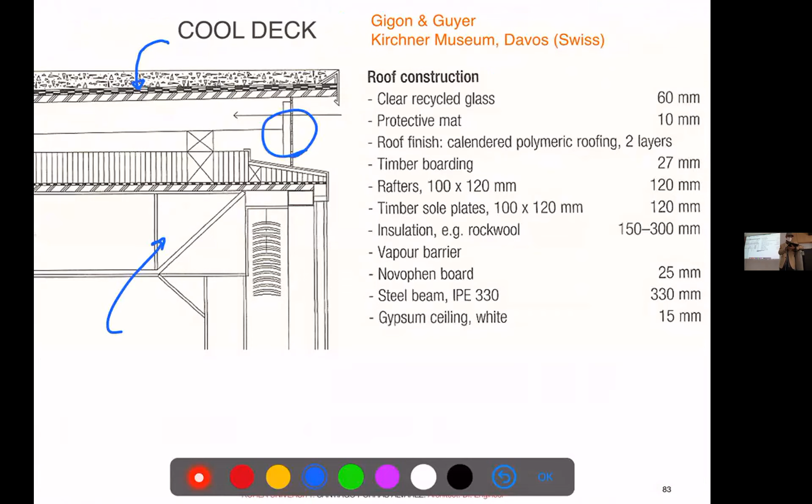This element for filtering the air is the one we know. Let me go back. Right. See the double layer and the gravel to protect it. So in this case, the advantage of protecting against UV and temperature is not so great. They will need replacement every so often.

But see the ending point. We don't see it very clearly, but probably this is one metal element which goes between layers. There's a small drip, right? So the waterproof will overlap over this steel, and probably you have another under, and you have this difficult point. And then you have a different flashing.

This is clearly a metal element which connects to the glass. So any kind of water which may come will slide through the glass, because the choice they have is minimalistic in that sense. You have a clear steel structure. You see this angle. This is clearly trying to make this joint as rigid as possible. And the upper part is just one board. So probably there we have a Novophen board.

This is clearly commercial, right? Some kind of a Swiss product. In your assignments and in professional work, unless everybody knows it, as you do with the ISO pink, usually give the commercial name plus the generic. So it's kind of gypsum board with a reinforcement or whatever it is, so we don't need to look for it. And I know you know what you're using, but in reality, usually we put both things to make sure everybody understands what it is.

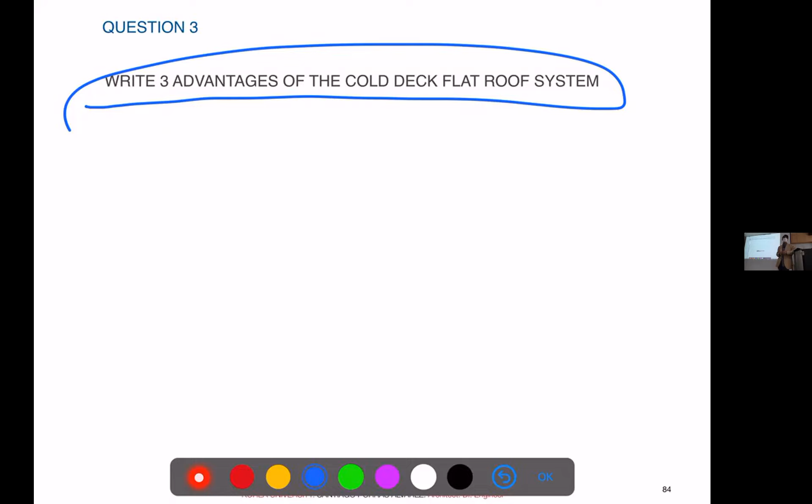Okay, who got at least 3 advantages? 2 advantages? Well, that's okay. If an exam question is worth 2 points on average, you might have like a 0.5 or 0.2. Not bad. Let's continue. One more example.

Again, this is a large terrace with another kind of handrails. So it's a different case, and also with the French doors to go outside. Again, this annoys me. They don't show the drainage point, which is difficult, but okay, they have their secrets. See, something which is continuously used in those projects is the open joint floor. So the water drains to the floor, never accumulates. You have it perfectly leveled. You always have a nice cap on the borders, so there's not an expansion problem.

And a nice extension of the waterproof in vertical, right? In this case, the difficulty is the ending point, as usual, with the handrail, and the continuity of the waterproof layer. This is a rendered facade, so that makes it easier to work. But still, this is one possibility of having a continuous solid interior and very continuous insulation outside. So let's take this out, or probably better erase and go back to the lecture.

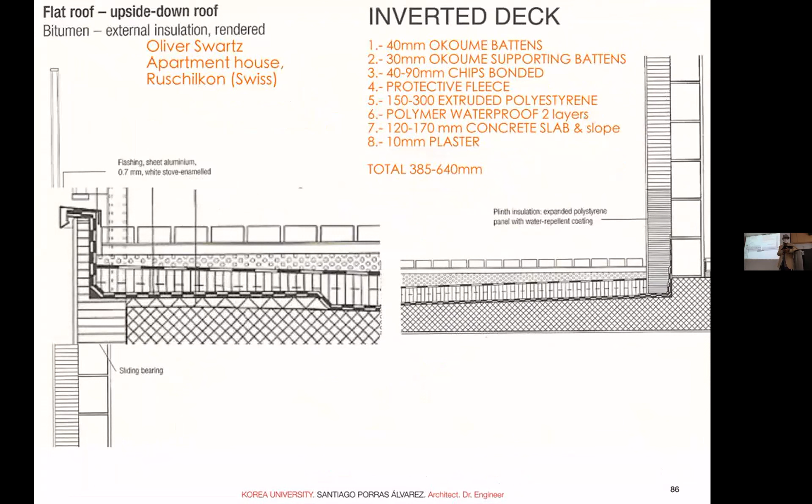So the interesting thing is, again, see the small angle to avoid the very acute bending of those elements. This is the most usual. It's usually about 3-5 centimeters. When you buy timber logs, 4 or 5 centimeters is typical, so just cut and you have this kind of angle. It's very cheap, very effective, and usually they are protected against humidity and they can last long. Also the duplicated layer, right, going down on this other element on the top.

And this inverted, so this is the confusion of the symbology. There, I cannot criticize because they are very good. This is the Swiss standard, but I find it easy to confuse those two graphics. This is a drainage layer, right? So the water filters, and then goes under the joints of the waterproofing and whatever exit they have.

So the point is then having flashing or metal sheet to make this cap. And this collects the 2 layers of waterproofing. So in this case, you have waterproofing up to the end. And the handrail, which is difficult, but it's fixed somewhere. So the handrail for sure will perforate the waterproof there, and will always be a difficult point to solve and to maintain. The other side is more clear.

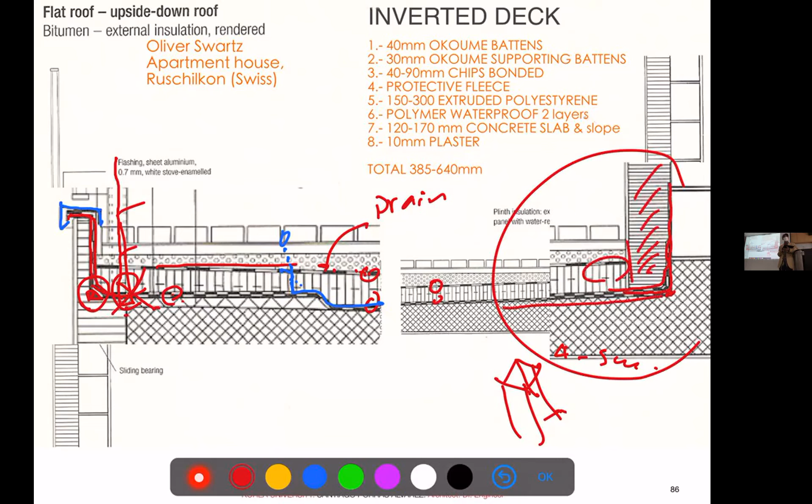So this is your exam of 2014. That time we had like 5 or 6 assignments before midterm. One of those was a case study of roofs, but it was group work. So this is to do at home. We don't have time to develop it here. So we have the warm deck, cool deck, inverted, and then green, which can be any of those.

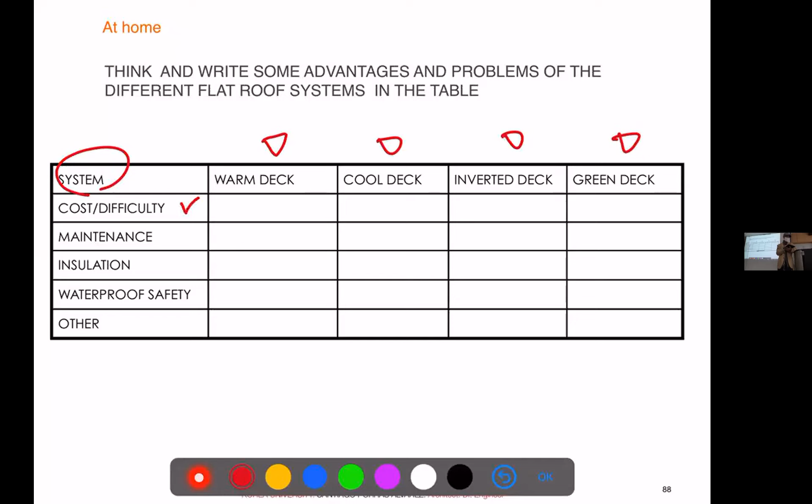So just think by yourselves on the cost and difficulty, maintenance, insulation. That means heat and sound, right? The safety risk, waterproofing and other things you can think of, in terms of having a kind of table of advantages and disadvantages. You may see what is most appropriate in this case.

You saw those examples were all from the textbook of the classes. They all elaborate on the same principles, but they make different choices depending on the projects, right? So there's not a perfect or unique solution. It depends very much on each project. So having this kind of comparison clear will help you also in making design decisions.

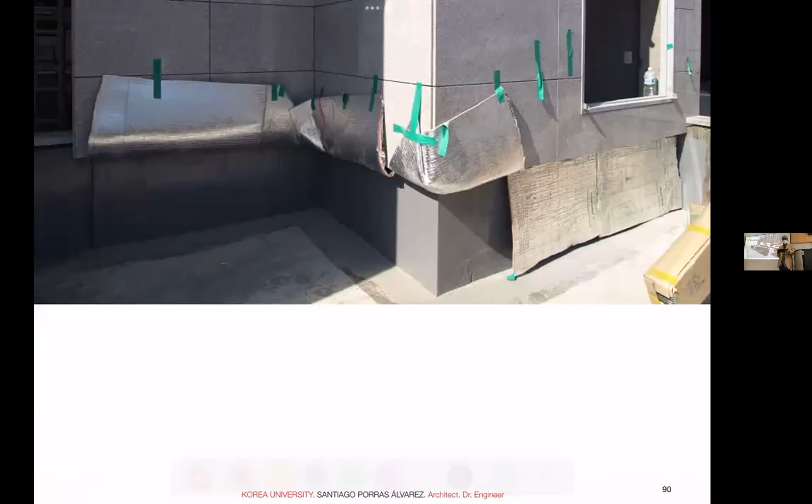This is an example of cool deck. This is the same, showing materials. I didn't visit so many more constructions there, but you see, even in painting, you will do the difficult corners first and then give another layer of painting in that area. This is the foil. This is a foil put in a ventilated chamber, so I'm not sure this is so efficient there.

And then another problem of the paint, which is the most common solution in Korea, probably a polyurethane paint: you need to have a totally clean base. And tell me how clean we can have a roof in Seoul. It collects dust by the minute, so it's a weak point. It must be also dry, so if it rains, you have to wait for it to dry totally, or you have water trapped there.

And then, this is before, right? But after, it must be also dry and clean. And with people working, it will just collect dust. If something falls inside or whatever, we have to repaint again. So it is very easy because it's continuous. But the same as with the silicone, it depends very much on how skillful the person applying it is.

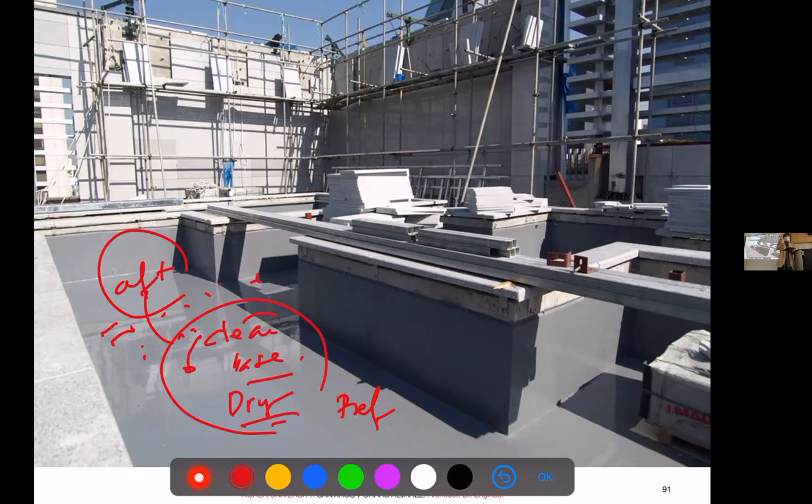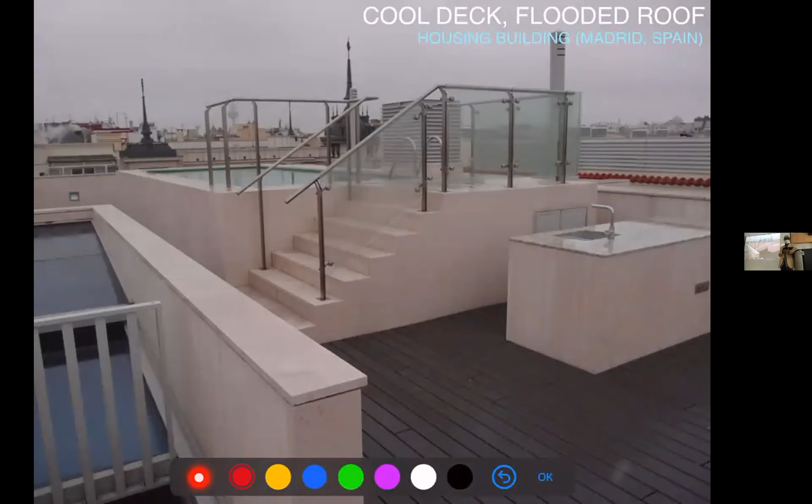There's an example, this is in Madrid, in which you make the cool deck just with a timber deck, and you may have the swimming pool, which in this case acts as a kind of water roof, right? Very seldom will the water freeze in Madrid. It might, but there are ways to deal with it. So if you maintain it, it's an excellent element for sound and temperature control. So there's the pool, and you always have some kind of gap between the deck and the borders. The free expansion is typical.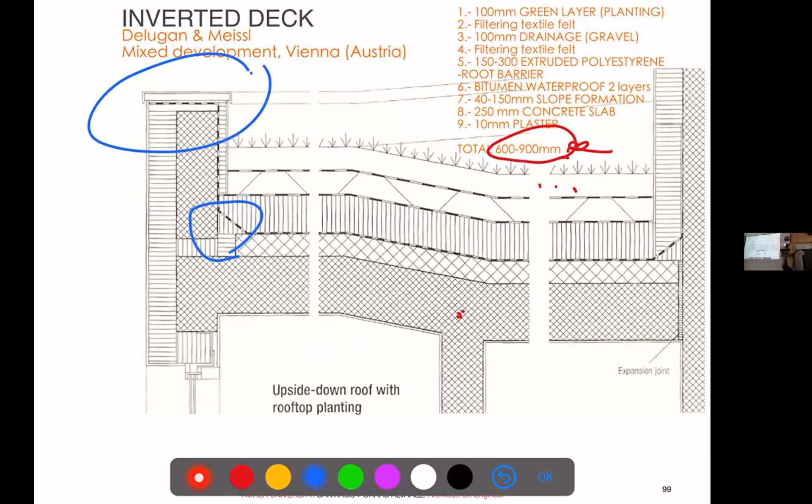But I don't think we need to explain many more things. We are already familiar with the cap. We are familiar with this detail, the connection. We know we have 2 separation layers, for the sand not going to the filter, and then the water going between the joints and being collected by the lower layer. When you have, well, we'll see, because we have photos.

I don't need to explain later. I don't need to explain now.

The cap is metal. It's very simple, but see how in some cases it's not just the 20 centimeters, it's making the waterproof up to the end so you don't have any chance of water going anywhere. It's not always the solution, but this is one of the choices we have.

And then almost the same on the other side of the wall. This is a real construction of bitumen layers. In this case, you see they should have gone a bit higher. They were only just 8 centimeters. That's not a good solution.

But we always check with 50 millimeters of water for at least 2 days. Then we calculate how much will evaporate depending on the weather. But if the level diminishes more than we expect, we try again until we see where things are happening. This is for the trial, we never expect to have so much water. If the water accumulates, this will not work. Making a swimming pool is different than making one roof.

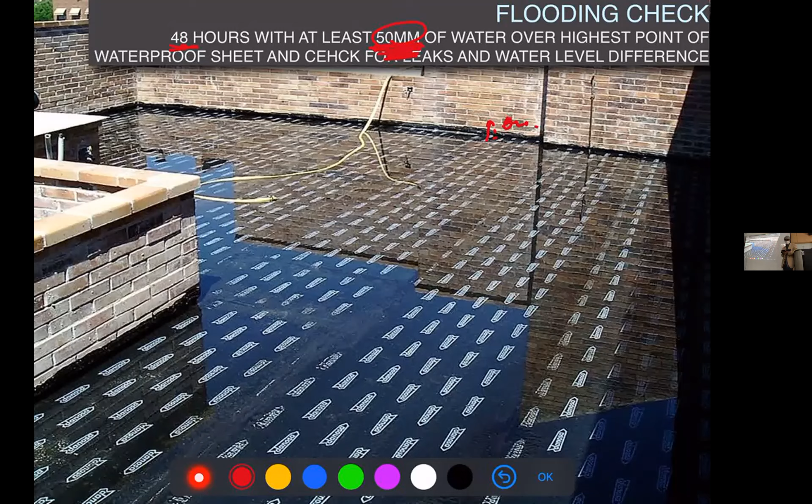This is the same with PVC, with polymer sheet. You see here, we have a decent, like a 30 centimeters border. And with PVC, things are welded. So this could probably be a swimming pool.

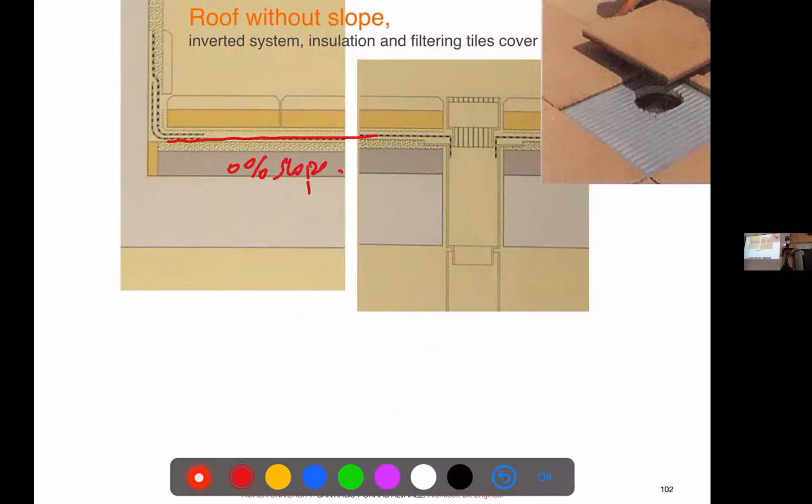PVC and some materials are very stable against water, moss, and deterioration. So they can be done without slope, like 0% slope. That means you will have some kind of accumulated water at some time. So you need very good joints and material which is really certified against chemical aggression.

But you avoid a lot of weight with this kind of leveling layer. And also you have a very slow rundown, or very slow evacuation of the water because it has to filter.

This is great, because we study in sustainability that fast runoff will collect a lot of pollution, heavy metals, particles from the atmosphere will go straight to the drain and to our rivers and sea, polluting everything. This slow process reduces erosion, also reduces the fast discharge to the drainage points, and allows a slow filtering of those particles along the way, which has several advantages.

And this is the example. This is like a prefabricated porous concrete. Filtering tiles, also porous concrete plus insulation, altogether.

What they do is the insulation has some kind of hole, and you have some tolerance for the water to run, because sometimes the water doesn't run okay. So especially near the gully, you will just give a bit more gap to let the water run out.

And actually, you don't need to show it, you can have it hidden under the tiles. It is an inverted deck. Again, it's very fast, very cheap, very safe, but has the trade-off of having to be careful with that water accumulation.

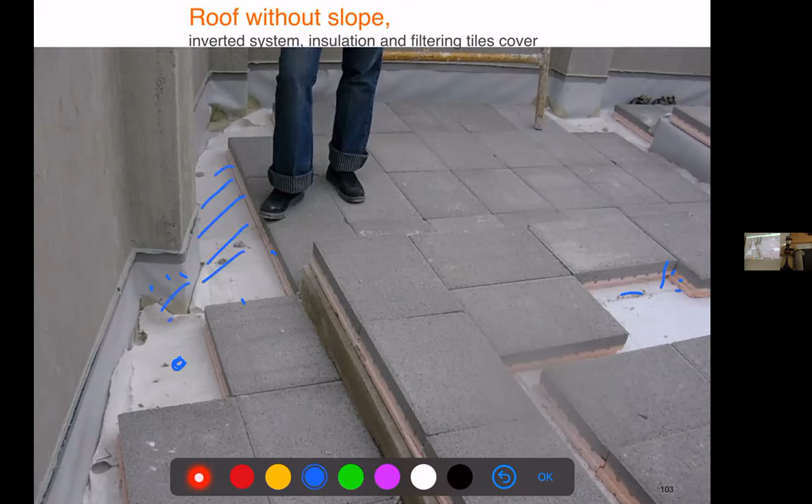So this is the construction. This was my site architect assistant. This is the construction guy, just checking on those difficult points. And the border is just filled with gravel.

This is not a visitable roof, so they usually are not cute, but for this kind of maintenance roof it was quite okay. It's not especially expensive, but it's quite easy to maintain and to use.

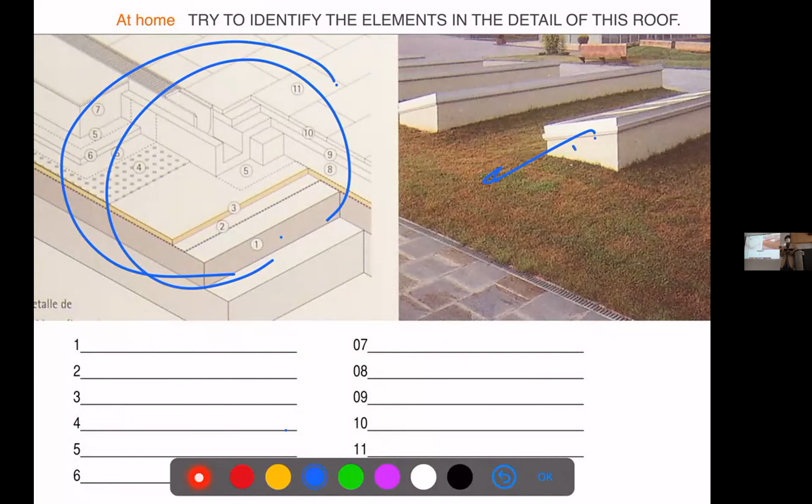If we have time, we would see this here. So actually, I don't give any kind of choice, you have the photo, you have the numbers. The graphics are different than in the Deplazes book, but you can get the logic by the photo and what you see there. You can find what is what. You don't need to even choose the materials. So please do also at home if you want.

And then checklist. This is also from a basic lecture, so I will not read it, I will just comment on a few important things. First is the slope planning. Usually you have to calculate according to the standards and the climate, but a very good approach, roughly, is to make it like 1 point every 100 square meters, because it's a 10 by 10 square, very easy to control. It's quite reasonable; larger than that and you have a lot of water.

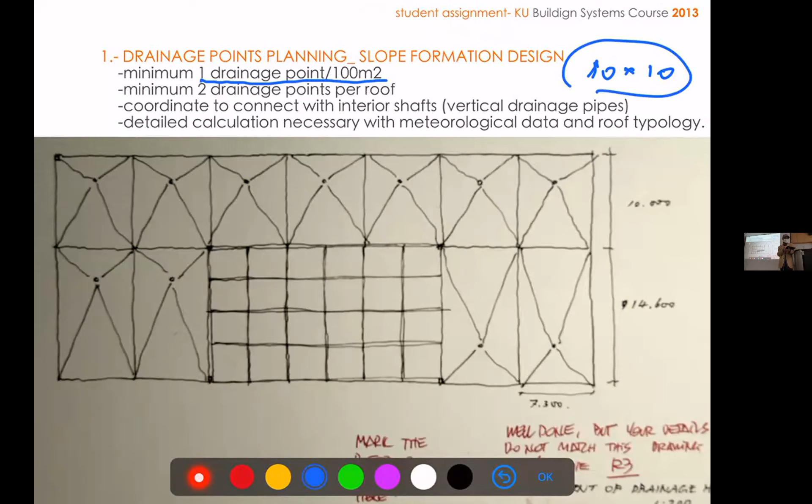Very small perforations will make too many drainage points. If you make very thick, very large rectangles, you will have a lot of sloping and a lot of weight. If you make them too small, you will have less slope but many holes.

So the choice between large and small sections - you can have only one or many small ones. You have to trade off between mass, weight, or many holes in the roof. But this is a good starting point.

At minimum, we put 2 drainage points just for safety. If one is closed, you have the other, but you need at least 2 choices. You always have to see how you can get a shaft in the interior. The reason those points are not centered symmetrically is probably because they are near a column or some element where you can connect to a shaft.

We try to make as few bendings and strange ways in the water path as possible. Of course this is just for initial planning - for detailed calculation, you need somebody to check it if you don't do it yourselves.

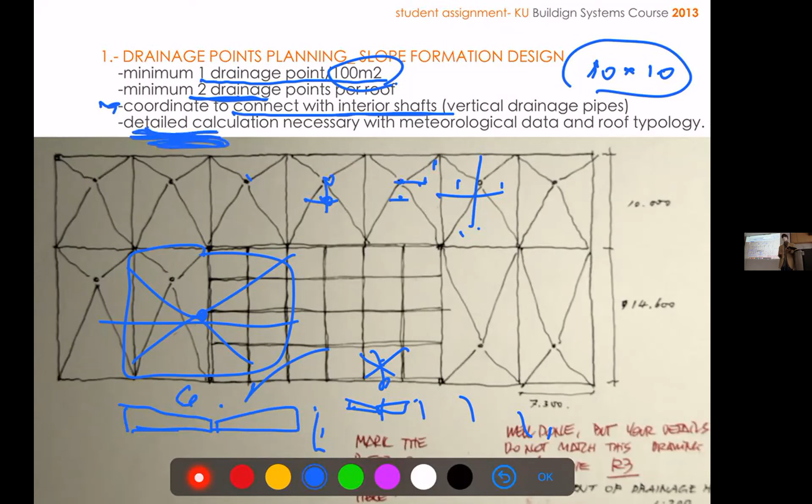You have to know the basic geometry of how to make sloped plans work together. This has no logic in geometry - you cannot build it. So in floor plan, an inverted pyramid will look like this.

If we make the 3-dimensional drawing, we'll have the points, and this will be like lines going down a little bit with some height. So we'll see those points there.

If we try to do it differently, if the point is there, you will have the same thing - this will be a very steep slope, and those will have smaller slopes. So the slope will be different. That's very basic, but when you draw, you have to be clear.

You put the drainage points where you really want, and people know how to do it. If you're not careful with a clear path for the water without pumps, the water will collect around - and this is very common. We always have ponds of water around the drainage points.

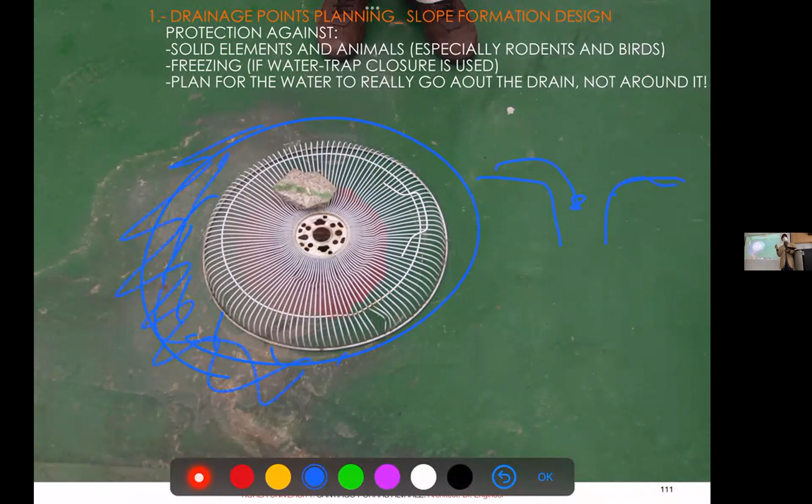This corner is the same problem we saw before in facades - a weak point where we'll always have cracks around the parapet due to expansion of the roofing elements. This shows insufficient provision of expansion joints, and probably not good joints, so you may have water infiltration deteriorating that area. Expansion joints and that detail are important for these kinds of buildings.

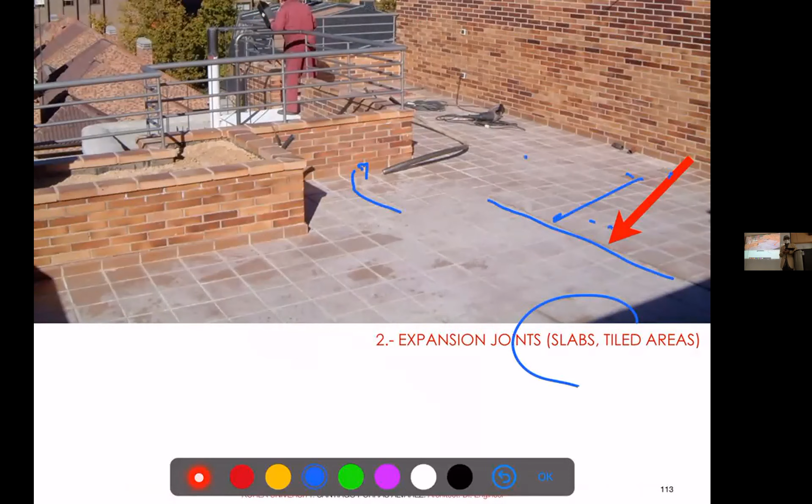This is the project we saw before. You have one element to cover the waterproofing on top, but you see expansion joints. On this sunshade plate, those expansion joints were every 3-4 meters, so we make sure things will move without problem.

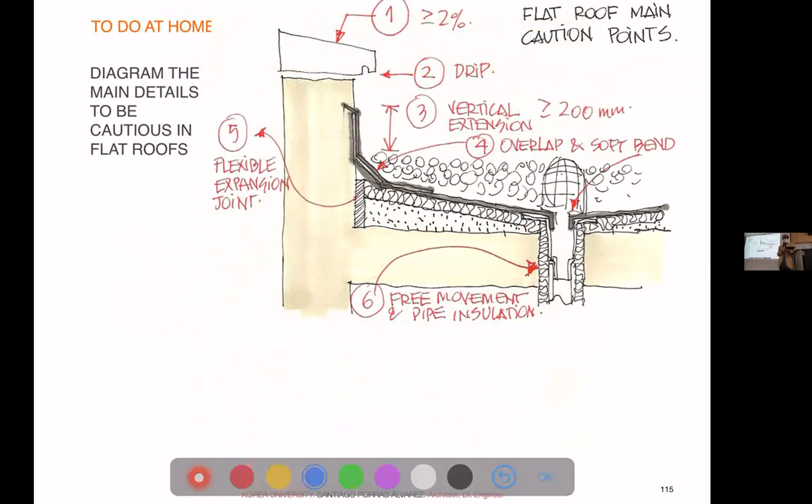Some of the cautionary points we already saw in the detail, so we won't need to repeat them. I know you already know this by memory since we covered this material many times, but it's not a bad idea to memorize it again for the exam - see how we have adjustment and expansion areas.

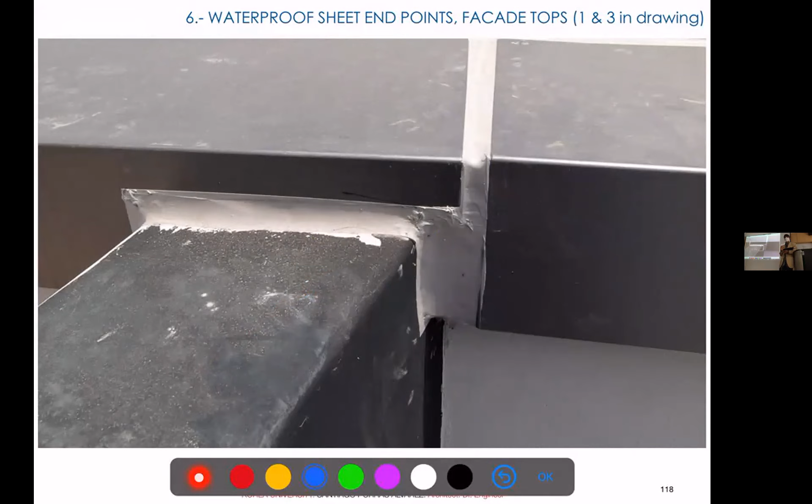This is a terrible detail - you will have this same problem as before, this area will be weak. I'll show at some point there's no way to make a gully here; you need to treat it correctly. Again, silicone is just a cheap construction - it's fast, cheap, and also brings problems in the near future.

So how are we about time? We solved the basics, we need... oh, we are over time. You didn't tell me - we are 5 minutes over time. This cannot be, something forbidden. How shall I do? We cannot go back in time. Well, this was exciting, I'm sure - you were so hooked you didn't feel the time passing.

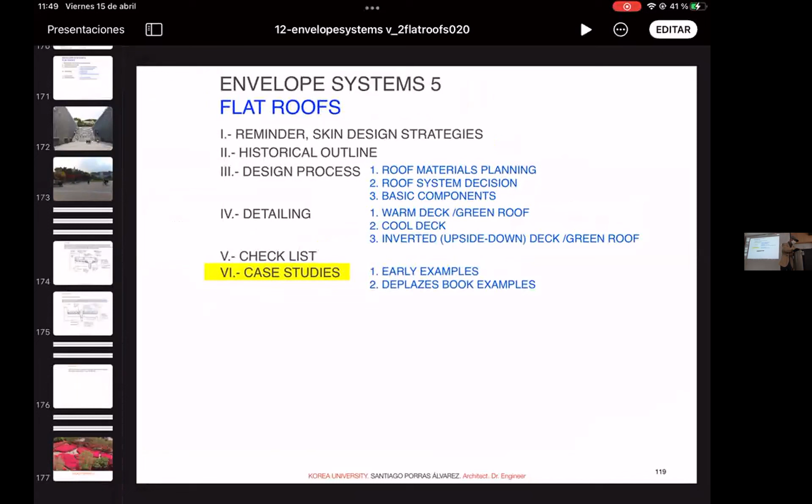So we saw quite a few examples and had only 50 slides left. In the handout, you'll have 2 examples - this is for an exam, so you can look at it at home. Those are details where you have to find errors - instead of doing it yourself, you find something that could be improved.